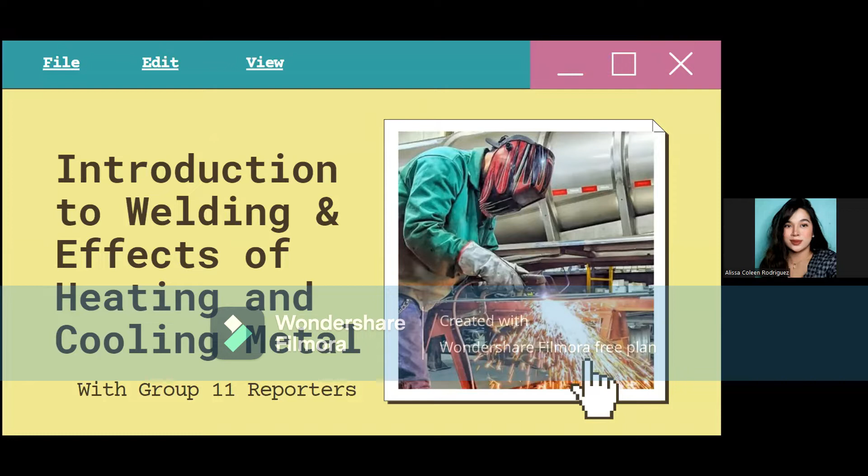Introduction to welding and the effects of heating and cooling metal.

Learning outcomes: at the end of this lesson, learners are expected to know what the process is and how welding works, understand different types of welding, and discover the effects of heating and cooling.

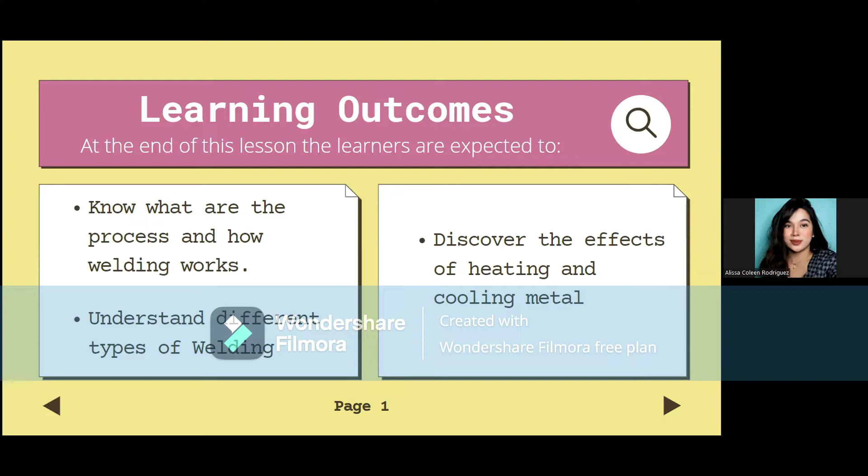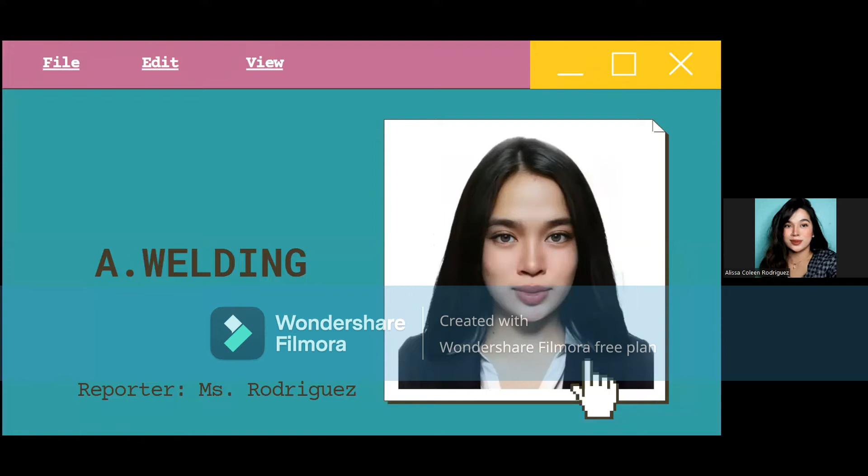What is welding? Welding is a fabrication process that involves fusing two or more parts together using heat, pressure, or both to form a joint as the parts cool. Welding is most commonly associated with metals and thermoplastics. Welding techniques used for joining metallic parts usually involve the application of heat.

As far as I know, we are all familiar with welding. This technique was discovered during efforts to manipulate iron into useful shapes. Basically, by melting the base metal and the filler metal at high temperatures, two metals can join together. This process is known as welding.

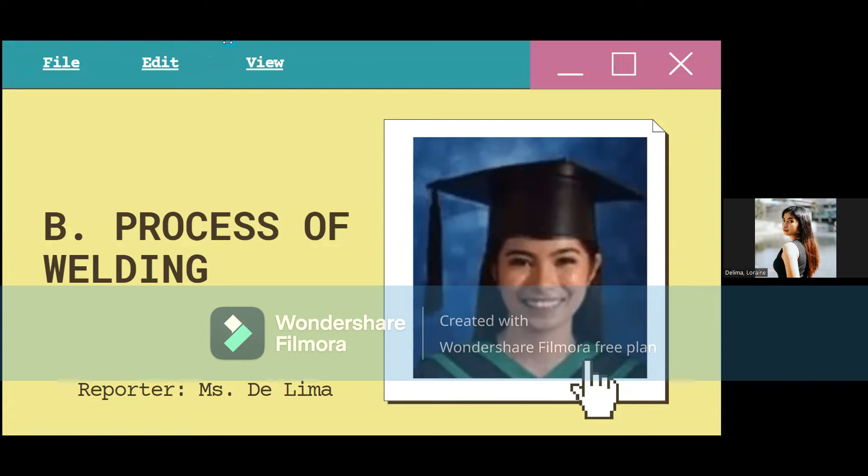Shielded metal arc welding, or stick welding: manual metal arc welding, MMA or MMAW, also known as shielded metal arc welding or SMAW. Flux shielded arc welding, or stick welding, is a process where the arc is struck between a flux-coated electrode metal rod and the workpiece. Both the rod and the surface of the workpiece melt to create a weld.

SMAW is usually ginagamit, the basic welding process, because it's easy to use and also the cheapest welding process. There you have a welding rod.

The welding rod is like a bullet or stick that melts to join two pieces of steel together. SMAW is very flexible because you can take it anywhere, but not all SMAW welding machines are lightweight; meron kasing mas mabibigat na SMAW. It also has high electric voltage: the lower current for the thinnest metal, and the higher current for the thickest metal. It's also affordable kasi maliit lang siya.

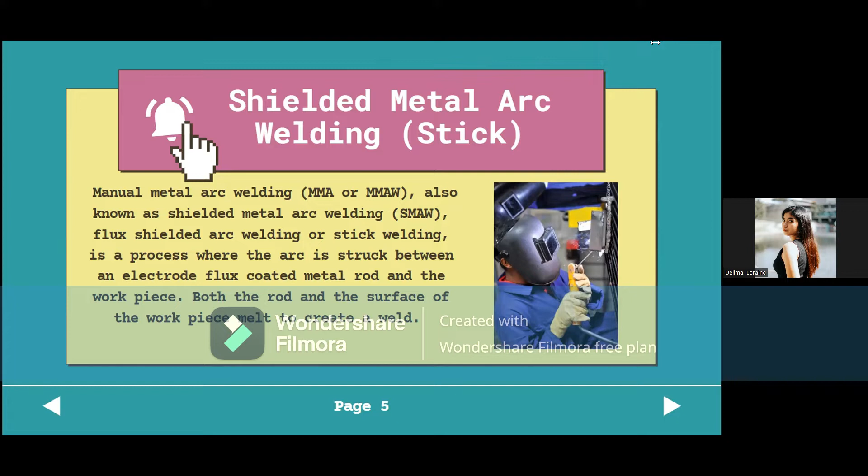Next is submerged arc welding, or sub-arc. Sub-arc welding is often an automated or machine welding procedure that can only work in a flat environment. Carriages, rotating rollers, and other equipment may cost a lot of money, in both vertical and horizontal orientations.

So this sub-arc is a welding machine used for quality products in joining metal. Kasi yung sub-arc, it is a machine that works on its own; yung pinaka-machine talaga ang nag-work, hindi siya ginagamitan ng tao or binibitbit, kasi napakalaki ng machine na ito, kaya ginagamit lang siya sa mga company, sa mga industriya talaga.

Also, it is not flexible to weld in different steels for combining metal, but it's very high quality, very clean, and solid because sub-arc is an automated machine.

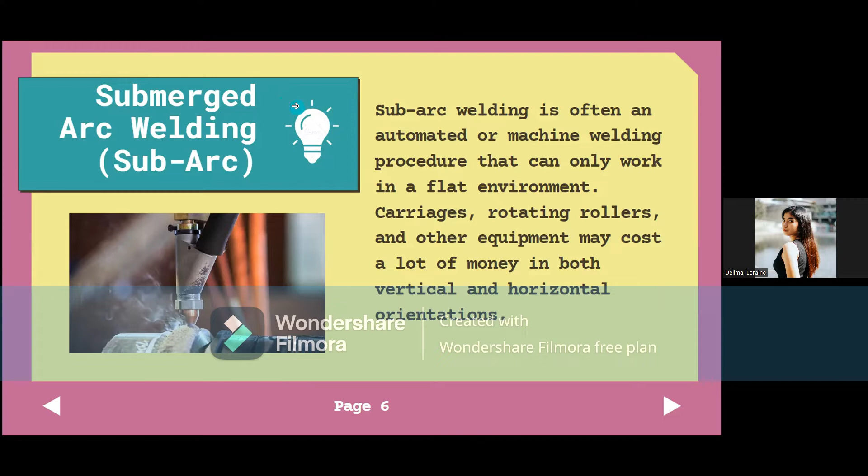Next is flux-cored arc welding, or FCAW. It is a productive and straightforward welding method widely used in industry. Flux-cored arc welding is a type of electric-resistance welding that uses an electric current to penetrate metals and join them. It is one of the easiest to use and produces high quality welds.

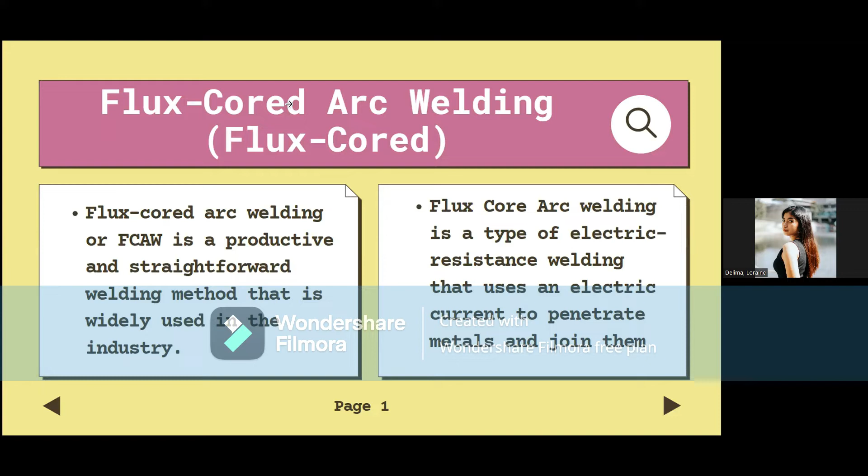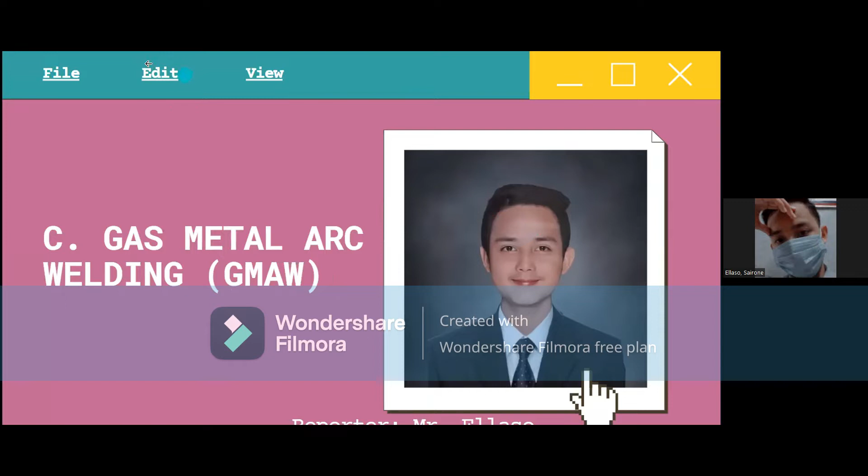Let me define it first. This is a process wherein an electric arc is formed between the metal and a wire electrode. So basically, gas metal arc welding is an arc welding process in which the source of heat is an arc formed between a consumable metal electrode and the workpiece, with an externally supplied gaseous shield of gas, either inert such as argon or helium.

Unlike SMAW, which was mentioned earlier by the first reporter and only uses an electrode and a welding gun, GMAW uses a gas like helium and argon along with a solid wire electrode to create a strong and solid connection between metals.

Gas metal arc welding, or GMAW, also known as metal inert gas or MIG, is one of the easiest welding techniques to learn. Using this technique, an operator feeds a solid wire electrode through a welding gun. Due to its simplicity, MIG welding is the preferred choice for beginners.

Some people claim that MIG welding is no harder than using a glue gun. Although the technique is more involved, there is no doubt that almost anyone can learn it very quickly.

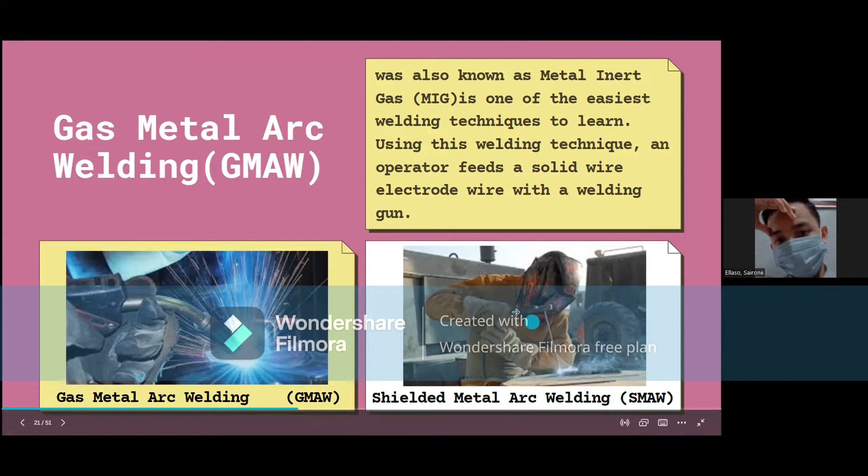Next is ways to apply. Next are the types of MIG welding.

The first type is short circuit transfer. This occurs when the wire contacts the metal, creating a short circuit. During the short circuit, the wire contacting the metal heats up and melts into the joint, creating a puddle from contact. The welding wire touches the metal, electricity goes through the gun, and a short circuit is created. The effect is a wet metal puddle that quickly solidifies and fuses the materials together.

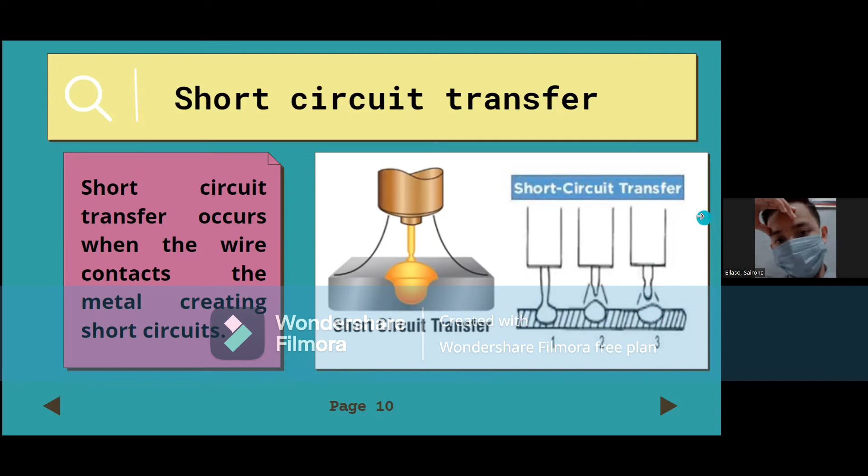So ang mangyayari po, mag-iiwan siya ng parang circular na image o result.

Next is the spray transfer. Minute molten droplets of metal travel via the arc onto the base metal or the joint being worked on. Spray arc welding is technically a spray of molten metal transfer over the arc, similar to water coming out from a garden hose with a restricted opening. Spray arc welding reduces welding splatter and produces a weld with a higher finesse level.

So dito naman po, kung kanina sa short circuit, idinidikit yung tip ng solid wire electrode sa metal. Dito naman po, hindi na idinidikit, nagkakaroon po ng space and continuous lang yung pagtulo ng natunaw na electrode. Kung mapapansin niyo po, yung pagtulo is constant. Yun po yung spray transfer at maliliit lang po. Parang kinumpara nga siya sa droplets ng gripo kapag natutulo, pero yung constant at medyo maliit lang yung size niya.

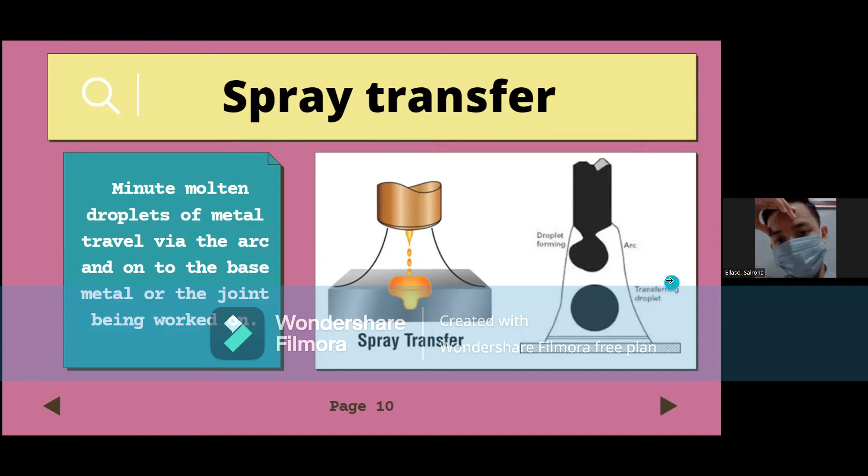Next is the globular transfer welding. This type of transfer refers to the state of transfer between short circuit and spray arc transfer mode. Large globules of wire are expelled off at the end of the electrode wire and enter the weld puddle. It is similar to a combination of the short circuit method and spray transfer method. An electrode wire arcs and touches the base material. However, there is a higher heat input and the wire is heated for a longer period. This creates a larger weld puddle which collects at the tip of the gun and drips into the joint.

So ito naman po ay combination siya ng first two, yung short circuit at spray transfer. Kasi nagc-create, kinumpara siya sa short circuit dahil iniipon din niya, nagagawa rin siya ng puddle na iniipon yung mga natunaw na electrode. Then kinumpara din po siya sa spray transfer dahil yung paraan niya ng pagtunaw ay similar sa spray.

Ang pinagkaiba lang, medyo malaki yung droplets na nilalaglag niya o binababa. Kapag sa spray kasi, constant po, tulad ng na-mention kanina, continuous o constant yung space sa pag-drop ng bawat isa. Dito naman po, hindi siya constant. Kumbaga, iniipon niya po muna bago matulo. Ganun po ang ginagawa niya.

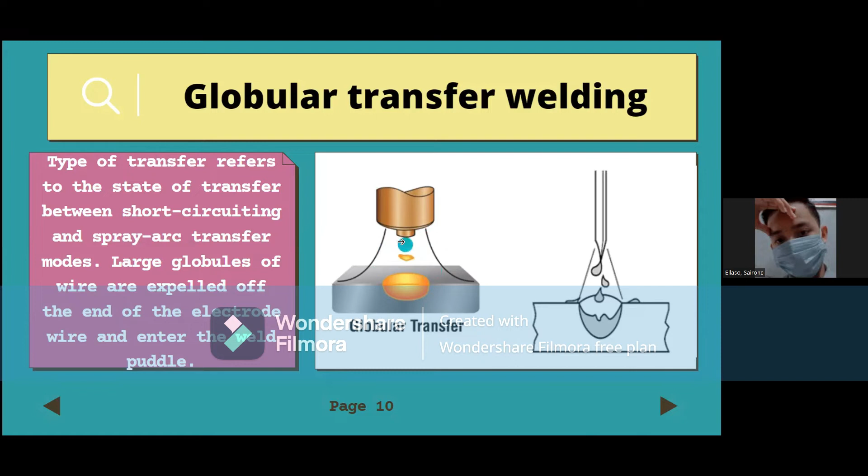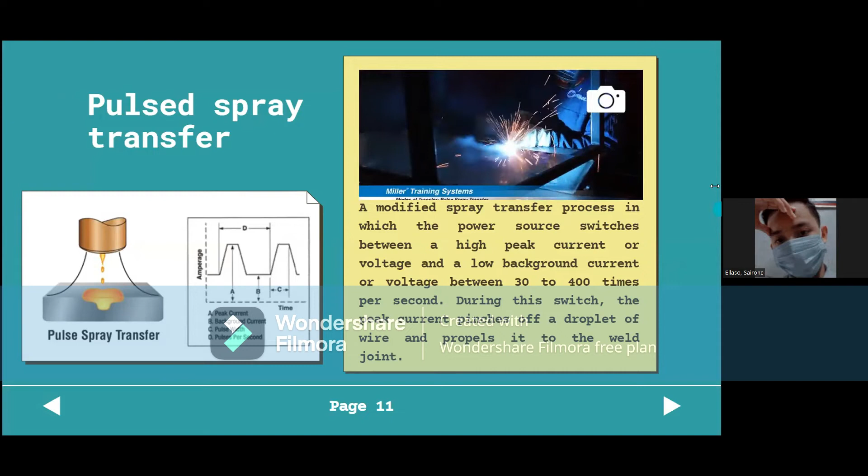So next is the pulse spray transfer. A modified spray transfer process in which the power source switches between a high peak current or voltage and a low background current or voltage between 30 to 400 times per second. During this switch, the peak current pinches off a droplet of wire and propels it to the joint at the weld joint. The pulse spray transfer is similar to the spray arc method but modified to remove potential disadvantages.

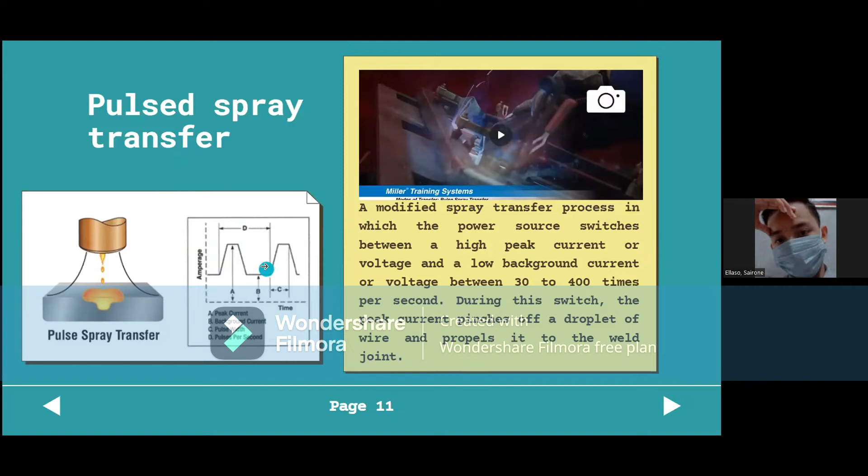The welder will pulse the voltage many times per second, allowing a droplet to form at the end of the wire that gets pushed across the arc into the puddle. So in short, para mas madaling maintindihan, itong pulse spray, ang ginagawa niya naman, kung makikita niyo sa diagram, nandun siya sa high peak ng diagram, doon siya magtutulo ng mga droplets. Then kapag nasa baba naman, yun yung pinaka-rest niya, kumbaga hindi siya magtutulo ng mga droplets. Kaya almost same din po sila sa mga na-mention kanina.

So next type ng pag-welding is the gas tungsten arc welding or GTAW, a type of arc welding which produces the weld using a non-consumable tungsten electrode. Inert gas such as argon or helium is used to protect the area being welded from contamination, and although not all, welding applications will require filler metal.

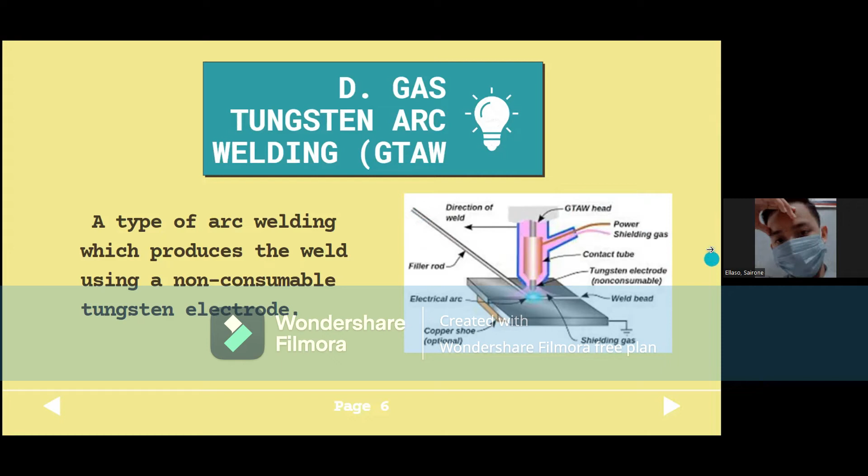So dito naman po, medyo iba na siya sa na-mention kanina na SMAW at GMAW, kasi itong GTAW ay katulad ng soldering process kung saan may filler na ginagamit para lumikha ng matibay na weld. Kung makikita niyo po, itong kulay puti na nasa gilid ng diagram, yan po yung filler. Then yung pinaka nasa center, yun po yung mismong welding gun. Dito sa picture, mas malinaw natin makikita yung pagkakaiba nila. Kaya po siya na-compare sa soldering process dahil katulad din yung ginagawa natin pag tayo nagso-solder.

Meron pong filler na ginagamit na tinutunaw ng mismong soldering iron. Dito naman po ganun din, may filler din na ginagamit na tutunawin ng welding gun. That's all po, thank you.

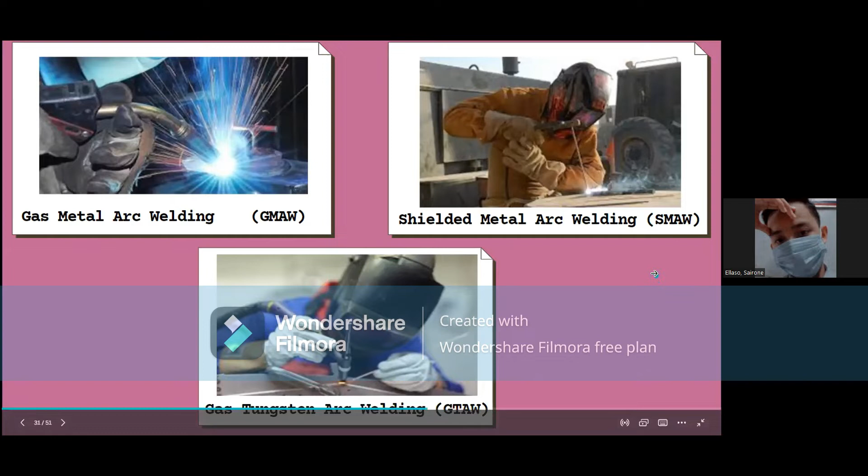Welders enjoy working with their hands and are not afraid to get dirty while doing so. Welders take pride in their work and strive to do their best on each project. When starting a career in welding, there are a variety of job options for those who have completed their degree and are looking for work. These are the 7 careers in welding.

First are the assemblers and fabricators. Assemblers are the workers who look for faulty components and mistakes throughout the assembly process. They use hand tools and machines to make vehicles, toys, electronic devices, and other items.

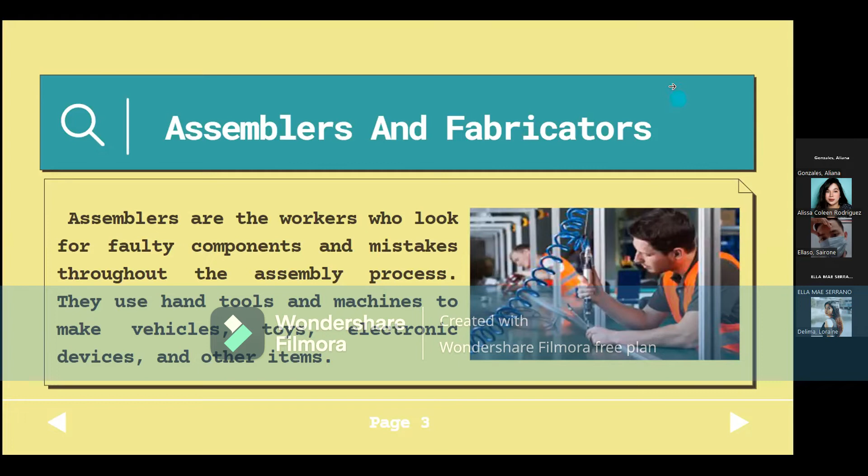This is a job that calls for careful repetition. As I said, they are the ones who look for faulty components. That's why they need to be careful in their work and able to perform it successfully, because they are the ones finishing the touches of the product or infrastructure, such as transportations, boats, aircraft, and ships.

Next is the boiler makers. Boiler makers are tradespeople who are responsible for cutting, shaping, assembling, and welding steel to construct and repair metal products and structures for boilers, ships, iron and steel structures, and other vessels.

Boiler makers produce steel fabrications from plates and tubes. Boiler makers are usually required to go to the job site because their work can be done on site, and they cannot perform their job virtually, unlike us. Also, this area of employment may need regional or national travel in order to execute the welding instructed, and that needs to be worked on.

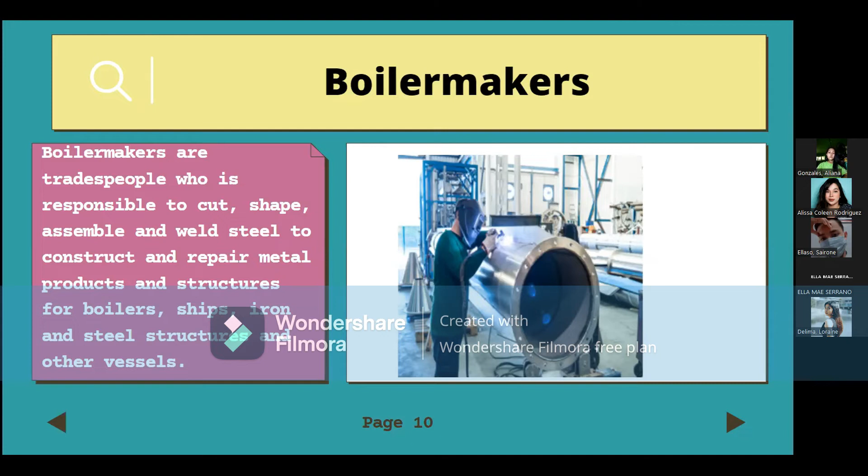Next is the jeweler, precious stone, and metal workers. Jewelers and precious stone and metal workers create and produce new pieces of jewelry by cutting, setting, and polishing gemstones; repair or adjust rings, necklaces, bracelets, earrings, and other jewelry; and appraise jewelry, precious metals, and gems using a variety of common and specialist equipment.

Jewelers and precious stone and metal workers spend their days seated working on a specific piece of jewelry. The majority of the jewelry they work on will be more expensive items, valuable stones and metals like gold, because these have a high value, and they fix them in order to increase the value of the jewelry they work on.

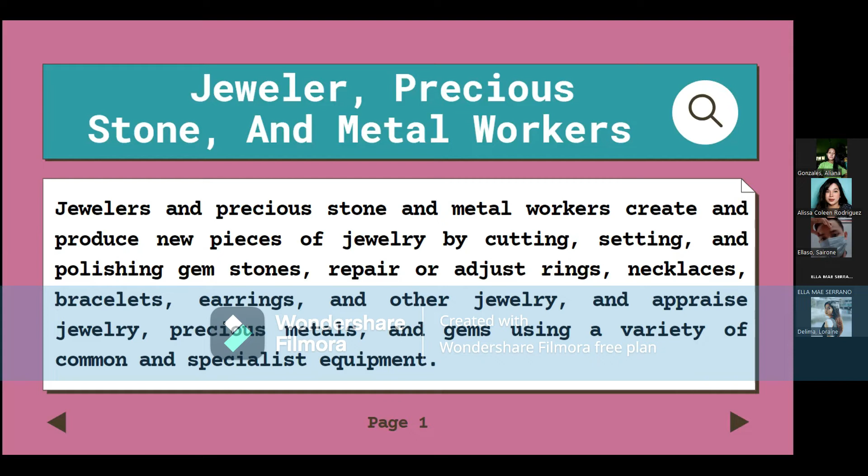The fourth one is the machinist, tool and die maker. Machinists and tool and die makers are responsible for setting up and operating a variety of computer-controlled and mechanically controlled equipment to produce precision metal parts, instruments, and tools.

Welders are responsible for working on welding parts, machinery, or tools that are utilized in a range of industries such as transportation—cars, trucks, and buses—like the assemblers and fabricators, and also construction, where they construct, weld, and finish construction tools.

This group of welders frequently works at night and on weekends in order to complete their jobs on time, so that other automotive or construction projects can continue their schedule. That's all.

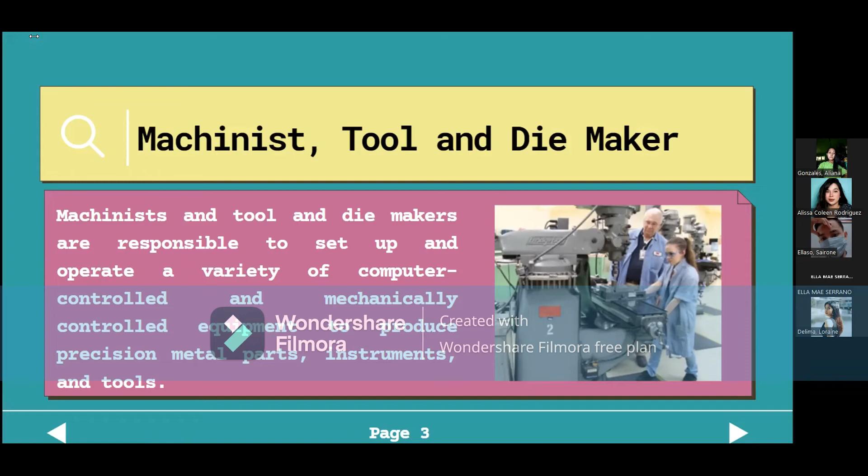Good day, I am Aliana Gonzales, and I will continue discussing this topic, which is under the careers in welding. For our fifth career, we have sheet metal workers.

They are also known as sheet metal mechanics. They are welders who are responsible for welding sheets together to come up with a specific product. Sheet metal workers build and repair goods for drainage and roofing purposes. They also fabricate and repair elements of heating, cooling, and ventilation systems.

So when we say sheet metal workers, usually these workers are the ones who design, install, and maintain metal products, particularly sheet metal products. And as we observe, anywhere we look, we will see something made by sheet metal workers.

Examples of sheet metal products are home appliance housings, building fixtures, automotive bodies, and even kitchenware and utensils that use at least a small application of sheet metal parts. These are the careers or workers who fabricate and install such products.

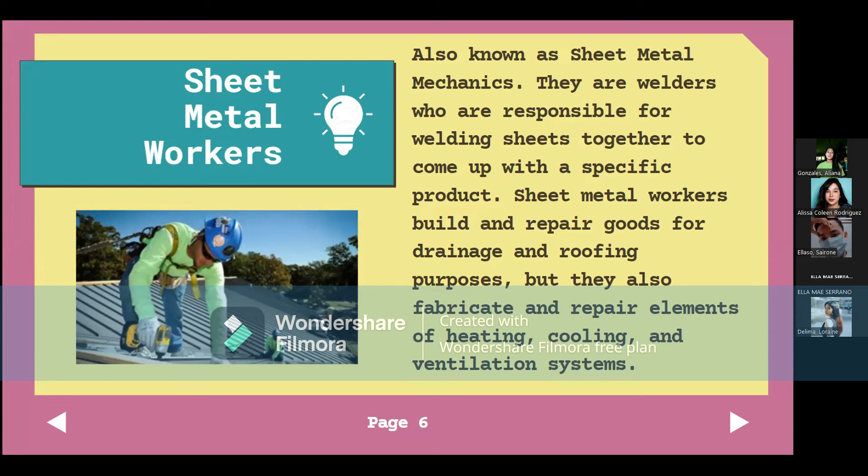Clearly, we can say that this career is under construction work. However, they are particularly under the trade, so they do a lot of welding in this career. That's why sheet metal workers are commonly found in construction sites, metal shops, or even manufacturing facilities. In addition, aside from welding, maintenance is also one of the specialties of our sheet metal workers.

Next, we have the metal and plastic machine worker. These are the workers who set up and run machines that cut, shape, and mold metal and plastic materials or pieces, so they are known as metal and plastic machine workers.

Aside from that work, these workers also monitor and adjust machines during operation. The machines they adjust or operate are used in making bottles, as well as molding machines. So these are the machines being supervised or monitored by metal and plastic machine workers.

Aside from monitoring, this career also includes constructing machines and setting them up according to technical specifications. They also have to supervise the machinery to make sure the specific machine runs smoothly. That's how metal and plastic machine workers do their job.

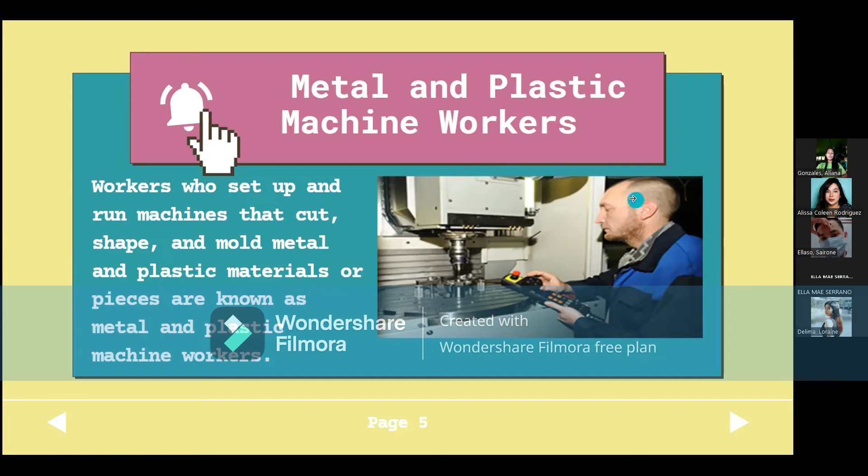For our last career in welding, we have plumbers, pipe fitters, and steam fitters. These are the workers, welders, who are responsible for assembling, installing, and repairing pipe systems to transport water, chemicals, and waste. Plumbers fix the water drainage and gas lines in homes and businesses.

These three careers are still quite different from each other. Plumbers work mostly in residential and commercial settings. Pipe fitters, on the other hand, are specialized in high pressure pipe systems, that's why they work most commonly in industrial settings. However, steam fitters are the workers who work in all kinds of places; they can be in industrial buildings and also construction sites.

In short, they have differences. These three careers perform distinct specialized roles. However, despite those differences, their duties are often similar. For example, they all install pipes and feeds that carry water, air, and even gases. They also determine the necessary materials for the job.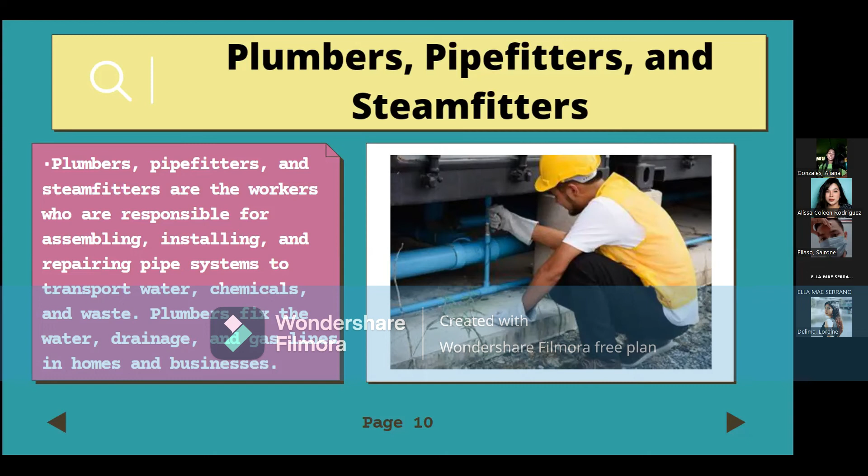Now we will proceed to lesson 3, effects of heating and cooling metal. Heat transfer: the heat transfer within the droplets and weld pool includes ohmic heating, conduction, and convection. The heat transferred from the arc plasma includes conduction and heat through thermal effect at the surface of the anode and cathode. Most of these forces and heat flux terms change as a function of time.

Going back, I think the best example of heat transfer is when we boil water. From the heat in the stove, it goes into the water, and that's where it starts to boil, and we can see there the convection, conduction, and radiation that I will discuss afterwards.

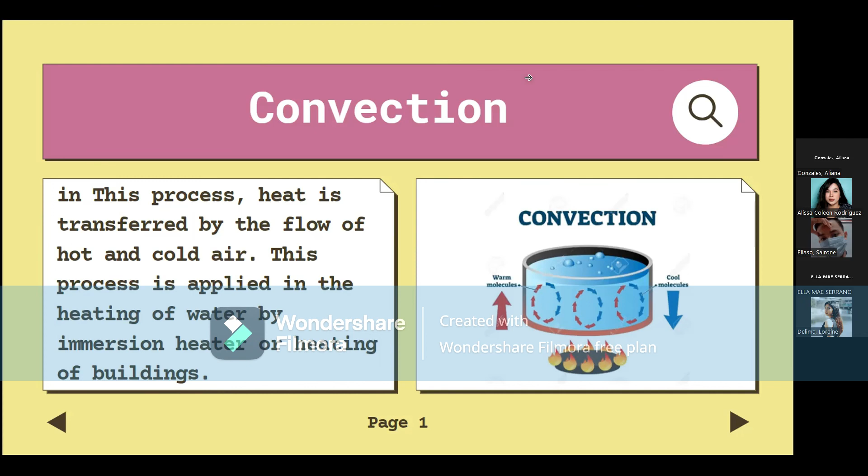Makikita nyo naman po dito sa picture kung paano siya, yung flow, yung process niya. Kumbaga, pag mainit na, yung mainit pumupunta siya sa ibabaw, tapos yung malamig sa ibabaw pumupunta siya sa ilalim. Next slide po. And I will be discussing about heat treatment.

So the term heat treatment refers to the process of heating metal without letting it melt or reach a molten state, and then carefully cooling it to achieve the appropriate mechanical property.

In heat treatment, there are three stages. First is heating the metal slowly to ensure that the metal maintains a uniform temperature. The second stage is soaking or holding the metal at a specific temperature for an allotted period of time. Lastly is cooling the metal to room temperature.

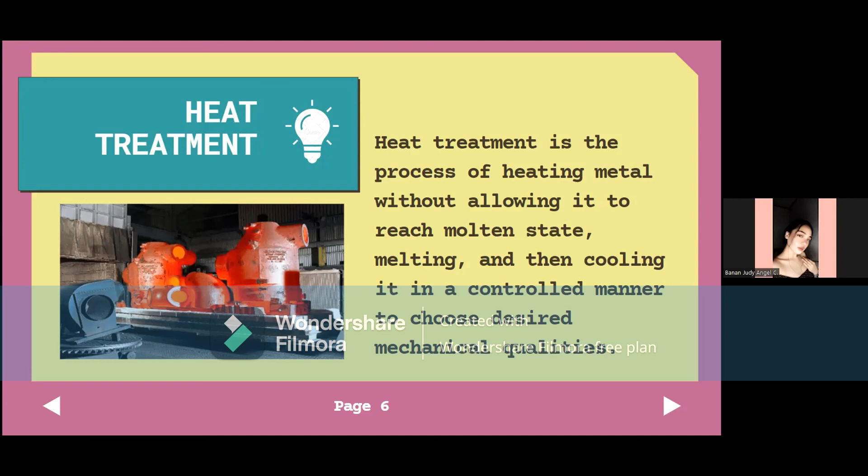In the process of heat treatment, there is quenching. Quenching is the quick cooling of a metal object from the high temperature at which it was formed, as by immersion in oil or water. Typically this is done to preserve mechanical characteristics of a crystalline structure or phase distribution that would be lost following slow cooling. Typically, the process is used to provide hardness to the steel object.

On the other hand, by heating and quenching, copper objects that have been hammered or otherwise deformed at ordinary temperatures and being hardened can be returned to a pliable state.

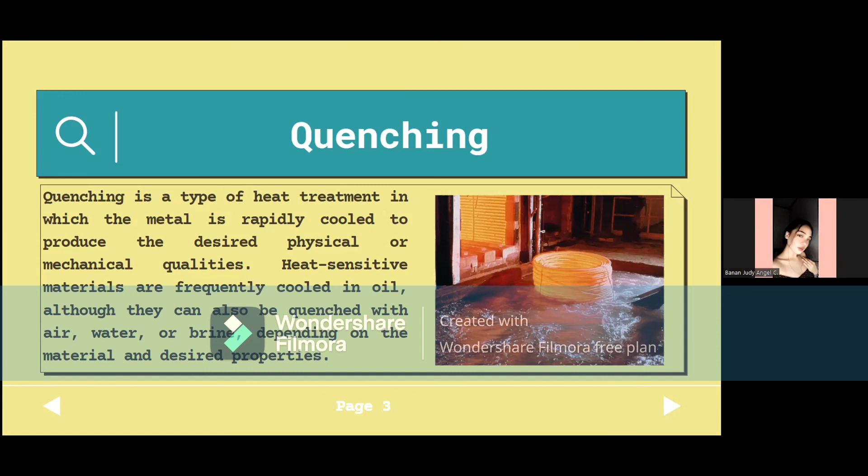Next is normalizing. Normalizing is defined as a heat treatment process where a material is held at a temperature for a certain period of time, usually 10 to 20 minutes, and then allowed to cool freely in the air to reach room temperature. The normalizing process is applied to metals that have been subjected to thermal or mechanical hardening processes and require their microstructure to be normalized. After normalizing, the metal regains its ductility and its hardness is reduced.

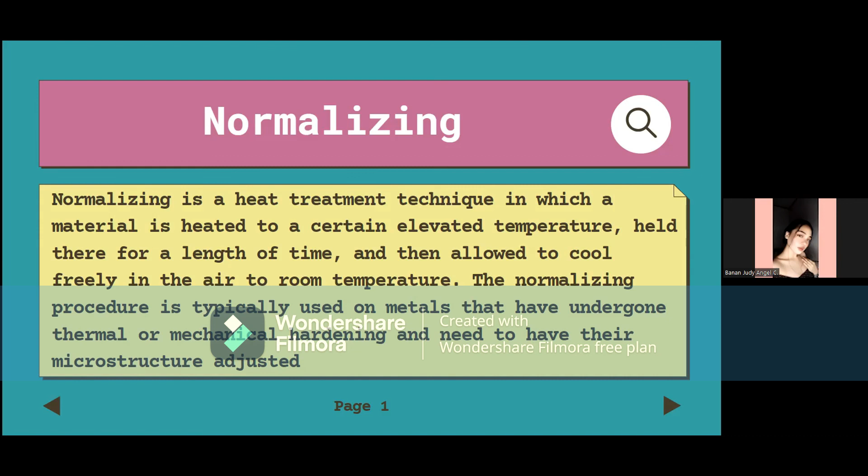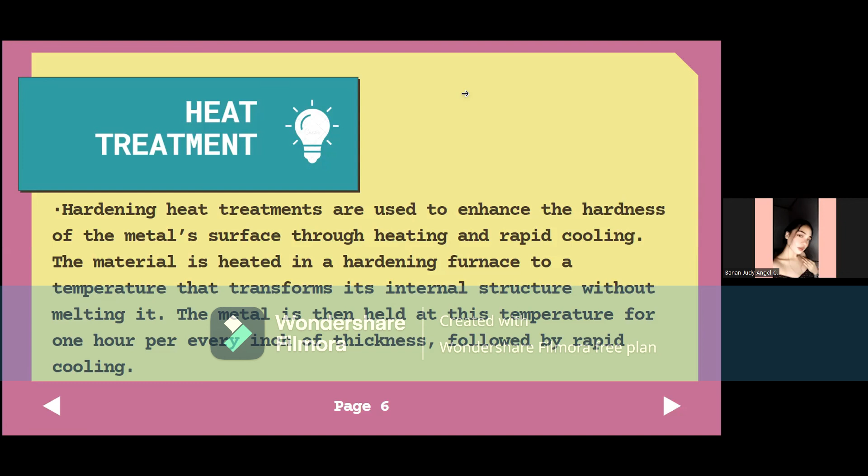Next is hardening heat treatment. Hardening heat treatments invariably involve heating to a sufficiently high temperature to dissolve solute-rich precipitates in the metal. It is then rapidly cooled to avoid reprecipitation, often done by quenching in water or oil. The concentration of solute dissolved in the metal is now much greater than the equilibrium concentration. This produces what is known as solid solution hardening, but the alloy can usually be hardened appreciably more by aging to allow a fine precipitate to form. Aging is done at an elevated temperature that is still sufficiently high to allow this.

The next stage is tempering. Tempering is a heat treatment that improves the toughness of hard, brittle steels so that they can hold up during processing. Tempering requires that the metal reach a temperature below what's called the lower critical temperature, depending on the alloy. This temperature can range from 400 to 1,300 degrees Celsius or Fahrenheit. Thank you.